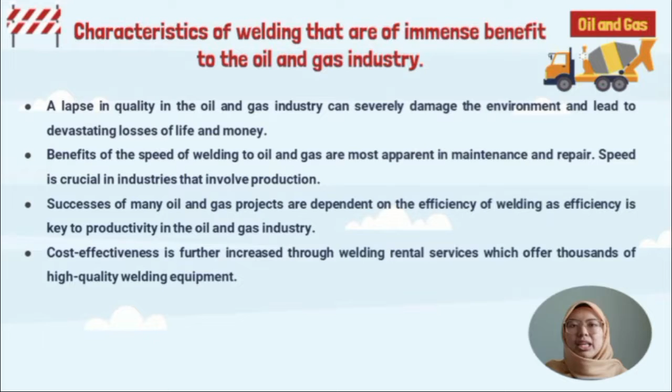I will give an explanation on types of welding joints in oil and gas. In the oil and gas industry, they usually use welding methods to join the pipe. In the welding process, we divide into two types of welding: fusion welding and solid state welding. In fusion welding, they use arc welding, which includes gas tungsten arc welding (GTAW), shielded metal arc welding (SMAW), and gas metal arc welding (GMAW).

For solid state welding, they use friction welding as a joining method in the oil and gas department. Firstly, gas tungsten arc welding (GTAW), also known as tungsten inert gas welding, is an arc welding process that uses a non-consumable tungsten electrode to produce the weld. The weld area and electrode are protected from oxidation by an inert shielding gas such as argon and helium.

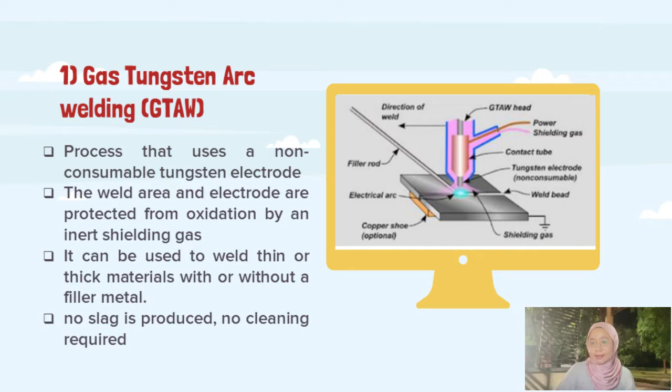The process can be used to weld thick or thin materials, with or without filler. One of the benefits of using this welding is that it produces an exceptionally clean weld where no slag is produced, so no cleaning is required. Next, shielded metal arc welding (SMAW), or stick welding, is a process which melts and joins metal by heating with an arc between a coated metal electrode and the workpiece.

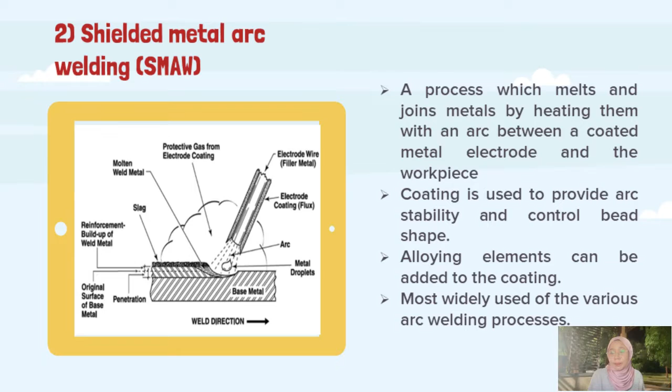Other functions of the coating are to provide arc stability and control bead shape, and alloying elements can be added to the coating. Furthermore, it is the most widely used of the various arc welding processes.

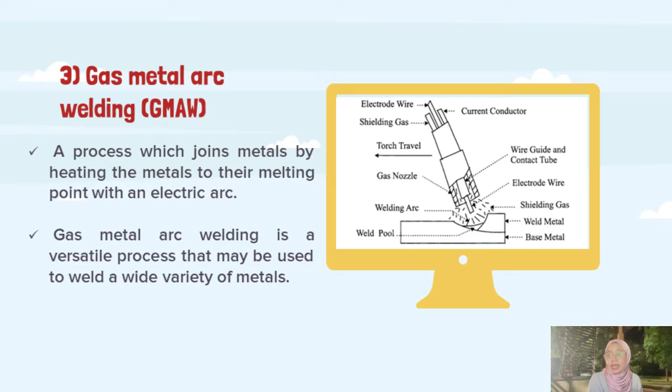Thirdly, gas metal arc welding (GMAW), also known as metal inert gas (MIG) welding. GMAW is a welding process which joins metal by heating it to the melting point with an electric arc. Gas metal arc welding is a versatile process that may be used to weld a wide variety of metals, including carbon steel and low alloy steel.

Lastly, solid state welding: they usually use friction welding. Friction welding (FRW) is a solid state welding process that generates heat through mechanical friction between workpieces in relative motion to one another. In this welding process, the friction is used to generate heat at the interface surface.

So why has friction welding been used in the oil and gas industry? First, the surface doesn't have to be clean. It offers superior weld strength, no use of flux, gas or filler material, less time required, customized solutions, a more reliable process, and adaptable technology.

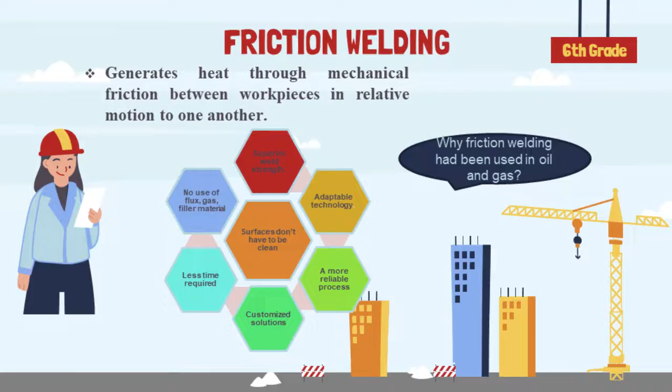According to the three types of welding that we chose in the oil and gas industry, the advantage of gas tungsten arc welding (GTAW) is that it produces a high quality weld structure, with no slag involved, therefore cleaning of slag is not required. Second, shielded metal arc welding (SMAW) is the simplest of all the arc welding processes.

And a big range of metals and alloys can be welded. Third, gas metal arc welding (GMAW): thick and thin, both types of workpieces can be welded effectively.

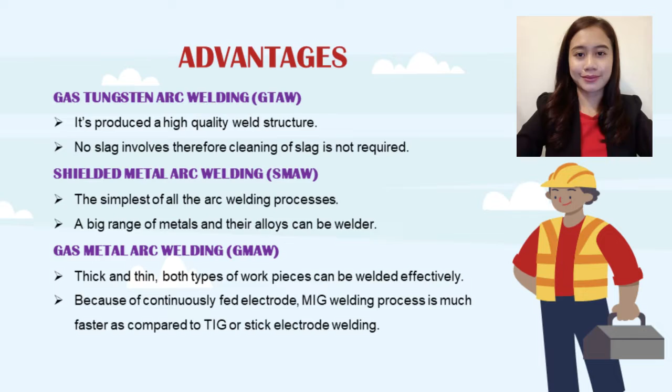Because of the continuously fed electrode, the MIG welding process is much faster as compared to TIG or stick electrode welding. The disadvantage for GTAW is that it is relatively expensive compared to other processes and normally a manual operation, so the welding rate is typically low. For SMAW, the process is discontinuous due to the limited length of the electrode, and the weld may contain slag inclusion.

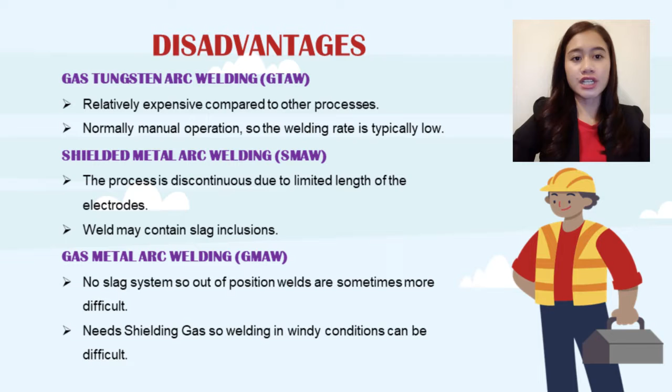Third, the disadvantage for GMAW is there is no slag system, so out of position welds are sometimes more difficult, and it needs shielding gas, so welding in windy conditions can be difficult. The application for GTAW is welding sheet metal and thinner sections. For SMAW, almost all of the commonly employed metals and alloys can be welded by this process. And GMAW is for the manufacture of refrigerator parts.

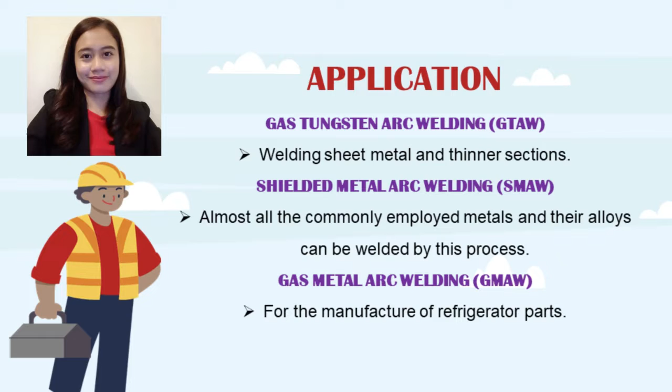Welder job responsibilities. There are some welding job titles in the oil and gas industry, such as pressure welder, drilling platform welder, pipeline arc welder, and others.

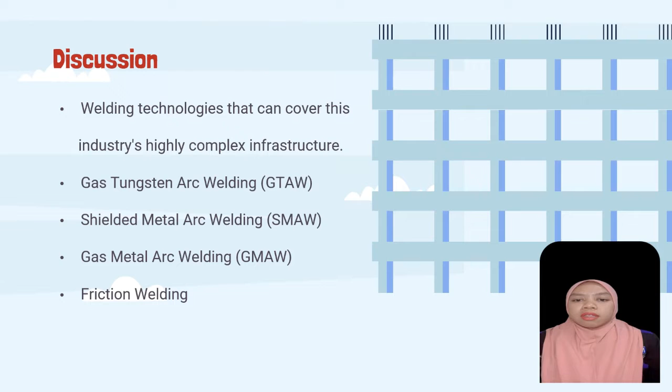In conclusion, joining technology in the oil and gas industry plays a very important role in the global energy supply as well as the world economy. Many technologies are crucial to the existence and functioning of this multi-billion industry. The oil and gas industry utilizes various highly complex infrastructure such as rigs, pipelines, platforms, plants, and facilities. The majority of these infrastructures are created using welding technologies. Welding is critical in oil and gas operations.

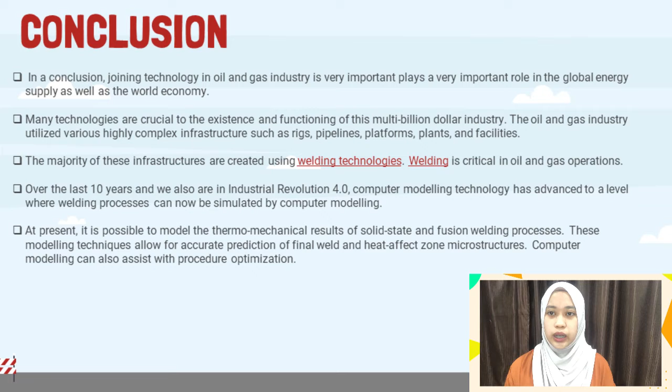Over the last 10 years, and as we are in Industrial Revolution 4.0, computer modeling technology has advanced to a level where the welding process can now be simulated using only computer modeling. At present, it is possible to model the thermomechanical results of solid-state and fusion welding processes. This modeling technique allows for accurate prediction of final weld and heat affected zone microstructures. Computer modeling can also assist with procedure optimization. Joining technology welding processes have been developed over the last 5 to 10 years with potential application to the upstream oil and gas industry.

The first one is friction stir welding. Friction stir welding has become an accepted joining process for aluminium alloys. It can produce high-quality joints in aluminium alloys with excellent mechanical properties at acceptable production rates. Current research and development is directed at extending friction stir welding to other materials including steel. The second is resistance projection welding. This process is on the cusp of implementation for pressure vessel fabrication and similar applications. Current research is being transitioned from the fundamental stage to real-world application.

And the third one is laser hybrid welding. Laser hybrid welding is currently being implemented into production fabrication. Over the next few years, it is expected to transition to upstream oil and gas welding applications.